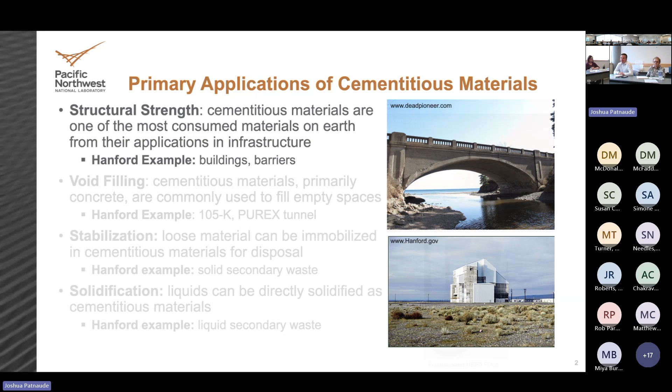The next approach people take is: if you've got a large space and want to fill it with something solid, do some void filling. Cementitious materials are an excellent low-cost, low-heat-generating approach to fill empty spaces. This is done across the globe, and specifically in waste cleanup, this is what we do when we D&D facilities or need urgent space filling. A perfect example of void filling was the Purex tunnel—to remediate the collapse that happened, you go in with a material that can flow into that large space and fill the gap.

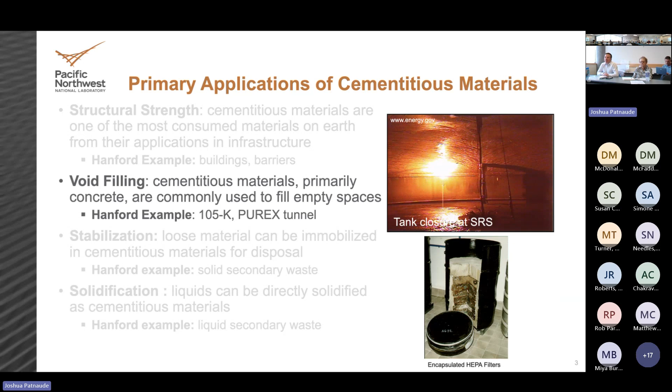Now we start to drift into applications more relevant to waste disposal, not just nuclear but waste disposal in general. Another good use of cementitious materials is stabilization. If you have a loose or particulate material that's hard to handle and transport, using a cementitious material that starts as a liquid slurry and then solidifies into a solid mass you can move is a great way to stabilize particulates. This is used broadly in the waste disposal community when stabilization is required. Here at Hanford, this would apply to handling particulate secondary waste generated from WTP—things coming out of the off-gas management system, fine particulates that need to be stabilized for disposal, using a cementitious material or grout to do that.

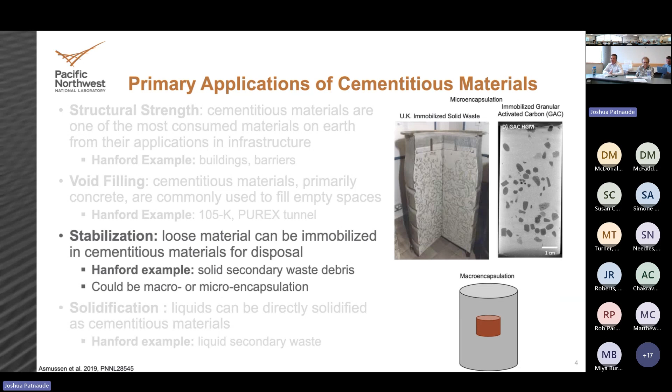And finally, where we drift more into the nuclear application space, cementitious materials are great for solidification because fundamentally they take a set of dry reagents—hydraulic cements—mix them with water, and that turns the liquid into a solid.

When we're doing solidification of a liquid waste, whether it's from a nuclear source or a wastewater, cementitious materials make a perfect option for this because you just add in some dry reagents and that liquid stream is now a solid mass that you can move to your desired location. It also gives you control over the properties of that final solidified product, depending on where it's going for disposal. So those are the four main applications we see generally across the globe for hydraulic cements, and we use them here at the Hanford Mission all across. So let's go to the next slide.

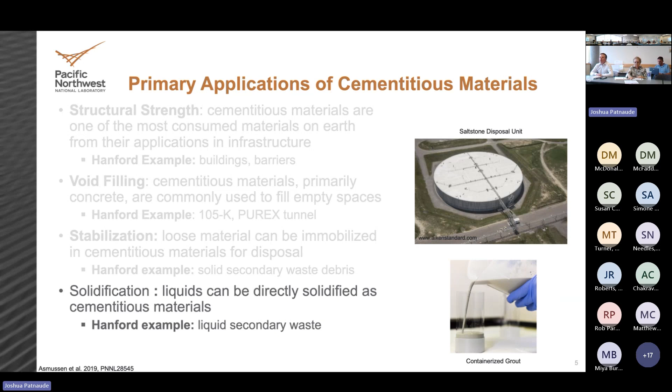We'll get into how they fundamentally work. We use cement as the example here, but pretty much any of the reagents we'd use in forming a cementitious material go through a fairly similar process: hydration reactions. I'll be explicit that we're speaking to hydraulic cements here, cements that react with water. We're not talking about materials like putty you'd put on your wall that react with CO2 in the air. Specific to hydraulic cements, what they do is go through a series of reactions called hydration reactions, and that is how you go from a liquid mixed with dry powder into a solid.

What happens is when you take cement, that fine powder, and put it into water, the particles start to dissolve in the water. As those individual grains start to dissolve, you release the dissolved components into solution. One of the fundamental chemistry rules is as you increase concentrations in solution, you eventually hit solubility limits, and as you hit those limits, things start to precipitate and grow out of solution. You can only keep so much in that liquid environment. That's exactly what's happening when you put cement into water.

The individual grains start to dissolve out, concentrations rapidly increase because it's a very fine powder with high surface area, a lot of dissolution happening, and you start precipitating what are known as hydration products. These hydration products, depending on the chemical content of the liquid and the makeup of that cement powder, can be a range of amorphous or crystalline phases that grow and link up together, and that's where the material gets its strength. Eventually you've reacted enough of the water and precipitated enough of those hydration products that you form a solid mass. So that liquid goes into a slurry and then cures into a solid particle.

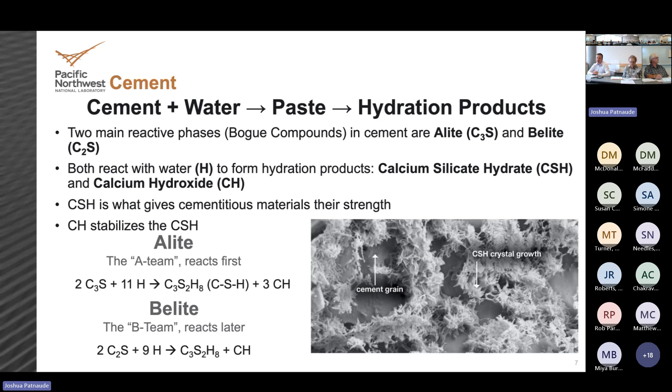So what does the progression of a cementitious material look like from the time you make it through its entire life? And I'm lucky that cementitious materials follow a similar pathway and terminology to the career that Will Smith has had. So when they start out, you have raw materials, similar to how, if you were a fan of hip hop in the late 1980s, Smith and Jazzy Jeff, their original stuff, it's not bad. It's a little rough around the edges, but it's a raw material.

Once you mix that cement powder with water, what you get is what's called a fresh material or fresh paste, similar to Will Smith's first thing being the Fresh Prince. Once you've had a fresh material, you're very much in a slurry state.

And as those cement reactions start to continue and we grow some of those minerals and things start to link up, you end up with a hardened paste. Will Smith became hardened in the mid-90s when he moved out of that Fresh Prince role and starred in Bad Boys, a very R-rated film that they should have stopped at just one. But you end up as a hardened material.

But at that point, it's still a young cement.

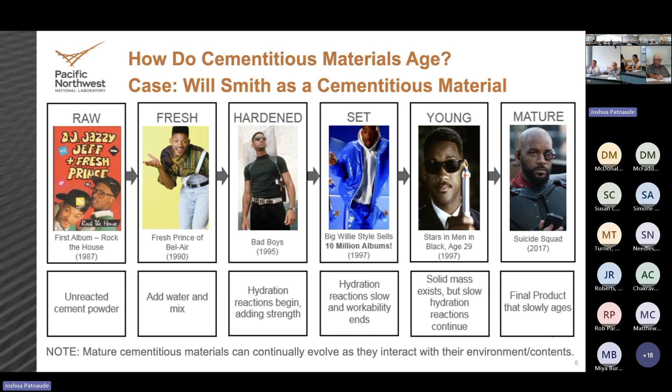Okay, next slide. And sometimes maybe the cement will crack. Smith cracked a couple of years ago.

But that also depends on what your material is, what the service environment is, what loads are put on it, and a lot of effort goes into us on the waste form side, but also the cement and concrete industry, trying to develop tools to be able to model and predict the probability of what the degree of cracking in cement materials would be, and what the failure modes would look like.

Some of the certainties in life are death, taxes, and your concrete will crack at some point, but that cracking could take thousands of years depending on what you put into it. So next slide.

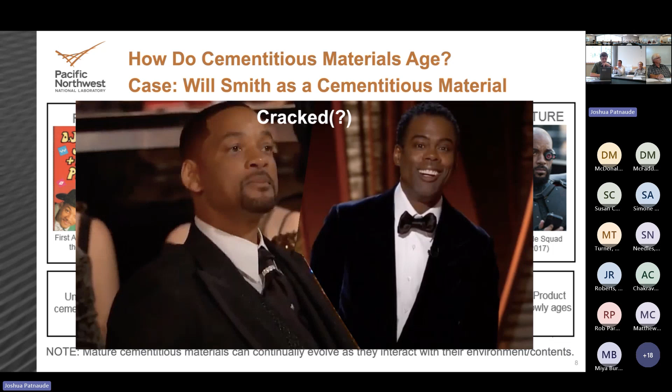Okay, so that was the case, just speaking solely to cement. But in nearly every application in waste immobilization or the general infrastructure application of cementitious materials, you don't just use 100% cement. And why is that? Why do we use additives and other things? There's a number of reasons for that.

The first one is from an environmental standpoint. In order to produce cement for use in cementitious materials, you require a lot of heat. You have to take a clay material, heat it up to very high temperature to produce clinker. We'll touch on that in a second. That goes into your eventual cement powder.

And doing that, it's usually done—we make a little bit of cement here in the US, but relative to the rest of the world, that cement generation is done with not carbon-friendly processes. So when we do environmental analyses, this is where you pay the largest carbon penalty, for example, in the production of cement. So you get a lot of CO2 production because it is a byproduct of the process, and also a byproduct of most of the power sources that run our cement production throughout the globe.

The other reason is demand. Like I said, cement is one of the most consumed substances annually across the globe. So there's a large demand for cement. So if you can use other materials or waste materials and lessen your demand, well, you save a lot of material, and you also save a lot of cost.

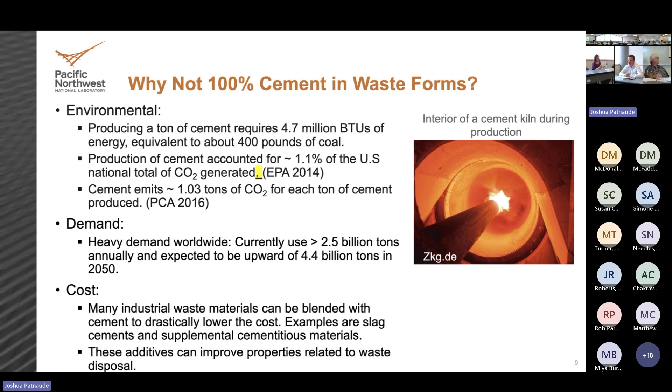Okay, so go to the next slide. So some of the definitions that take it from cement to the actual materials, and I'll show how this fits in waste management in a second.

So if we take cement and water and mix it together, that's not usually a material that's used quite a lot because of that cost factor. So what people try to do, especially in an infrastructure or structural application, is add stuff into it to take up space without sacrificing properties.

And the two most common things you do are you either add in sand or you add in rocks. So if you take cement and water and add in sand, that gets you a mortar. If you take cement, sand, and add in some rocks, that gets you concrete. And in both of those cases, those aggregates are just acting as a filler.

They're not really giving a lot of properties. You might get a small uptick in strength, depending on how you formulated things. But the biggest reason you're adding aggregates in there is just to take up space and use less cement to fill whatever structure you're trying to construct. So next slide.

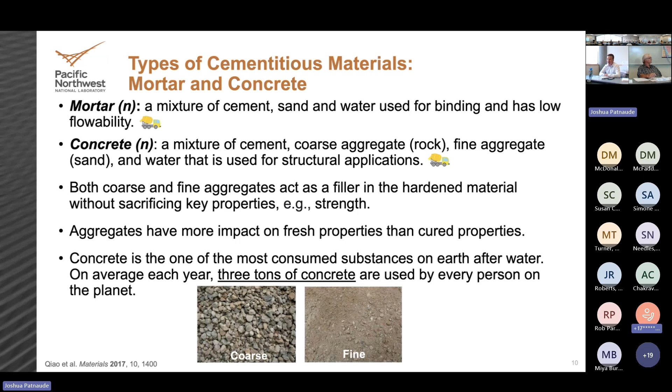So how do these mixes all come together, and how do we group things in terms of our terminology when we do waste management?

What we start out with to get to a cement product is limestone and clay. You mix them together, put them in a kiln, and heat it up to about 1400 degrees Celsius. What comes out of that kiln are little nodules, and those nodules are called clinker. This material contains tricalcium silicate, dicalcium silicate, those reactive compounds that will end up making those hydration products. So the nodules that come out are clinker.

This is the main reactive component of cement. They'll take these nodules, grind them up into a fine powder, and mix it with other chemicals - aluminum sources, lime, magnesium sources - to tailor the resulting cement powder for a specific application. There are a number of different types of cement. The most common ones are type 1, type 2 Portland cement, which is now essentially type 1L cement, which is Portland limestone cement. You do those additives to get specific properties in your final material, but also to save cost.

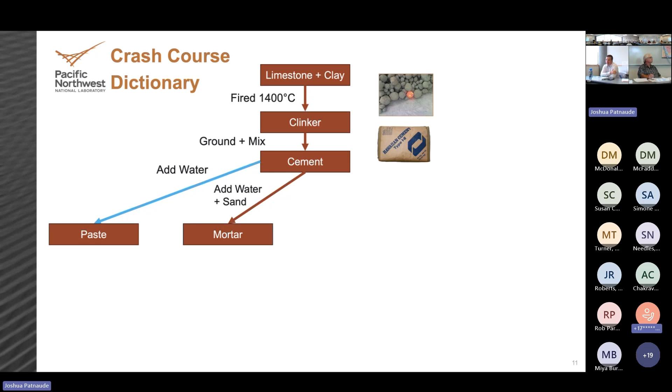If we make something that looks like mortar, but add some chemical additives to make it flow a bit more, this is traditionally referred to as grout - flowable slurries used to fill the space between tiles on your floor. One of the main challenges when I speak to university partners is that when I say we use grout for nuclear waste immobilization, this is where people's brains go right away. I like showing these slides - yes, this is our traditional definition of grout, but we'll get to in a second why we call everything grout. So the mixture of cement, water, sand with some additives gets you a flowable material - that's a grout.

And then if you add in coarse aggregate, throwing in some rocks, that gets you concrete. My prior experience in cement and concrete before coming to PNNL - my grandfather was a contractor, so I poured thousands of yards of concrete with him working it throughout the years.

I never put two and two together why he would always, especially when I was really little, send me out to find the biggest rocks I could at the site when we were doing a foundation or something, and we would just throw them in. Oh, I'm just filling space. It was aggregate, but it's filling space.

So that's the main technical definitions of the various types of products you get when you mix cement with water and other fillers: paste, mortars, grouts, or concrete. But within the DOE world, or anywhere here in the US, if we apply this to nuclear waste immobilization or disposal, all of those can be referred to as grout.

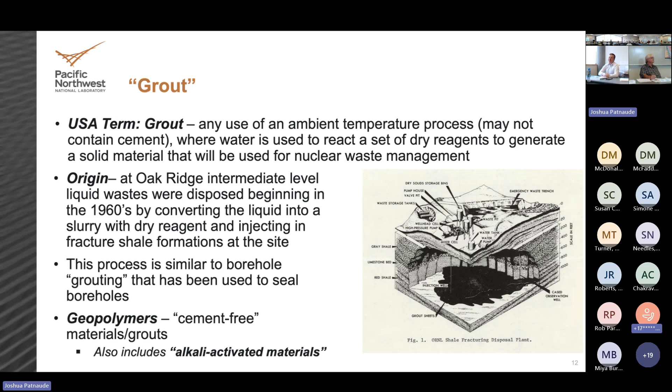So in those four types of materials we'd call grout, where do we apply them in waste management? The first one, paste - what we produce when we do liquid waste immobilization, such as producing saltstone at the Savannah River site. That resulting material is a paste, just a set of dry reagents mixed with a liquid, looking no different than if you mix cement and water. Nothing else gets added; you're just using dry reagents designed to properly react with that liquid and its chemistry.

Then, moving into solid waste encapsulation or stabilization of particulate materials - depending on the material, the disposal site, and desired properties - we can use paste, mortars, or things more flowable like grouts. Paste and mortars are used for particulate stabilization or macro encapsulation. So if we have HEPA filters to encapsulate, you'd use something like a paste or mortar. If we've got a spent melter from a waste treatment plant to be encapsulated for disposal, you'd use a paste or mortar. On the grout side of things, that's something we'd use for maybe more facility closure.

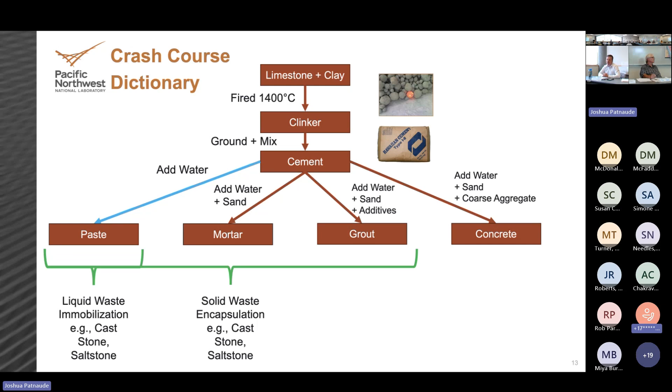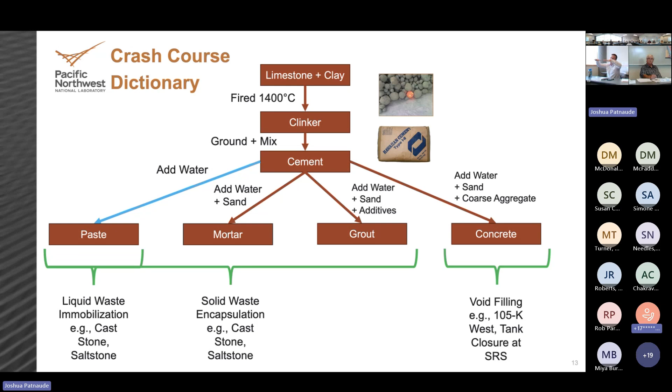So if we're D&Ding a facility and you wanted to fill into a void space, something that looks like a grout that will run and flow is likely used. And then concretes are things that look a lot like what we've used in void filling or tank closure at other sites, mainly the tank closure done at Savannah River Site. Those materials are very similar to conventional concretes, although tailored to be far more flowable and have ideal set times. If you're filling a million gallon tank, you can continually operate and get a resulting product, but it looks a lot like concrete.

So, I'm telling the story of why we add other things in. If you're doing this from an industrial standpoint, the main reason why they add other things into the cement is to save costs. They do get some control over properties, but their main driver is less cement equals less money.

In our world, the use of supplementary cementitious materials really lets us get control over engineering targeted properties into our grouts that will be used to meet specific waste immobilization challenges. All these different components that we can take from industrial byproducts have similar hydration reactions, and we can use their individual properties to tailor our materials to meet specific needs in our waste management challenges.

So the technical term for these is supplementary cementitious materials, things that aren't cement that we add into grouts or cementitious materials to make our final products.

These supplementary cementitious materials can have different sources. They can come from natural sources, which we'd call pozzolana, meaning a naturally occurring material that has pozzolanic activity, the ability to react with water and a bit of calcium to produce hydration reactions. These are mainly aluminosilicate materials from volcanoes or prior volcanic activity. Fundamentally, you have a mineral containing calcium, silicon, and aluminum, exposed to very high temperature, powdered down, and it becomes reactive with water. It's no different than what happened with cement, where you took limestone and clay, cooked it at a very high temperature, and produced a powder that can react.

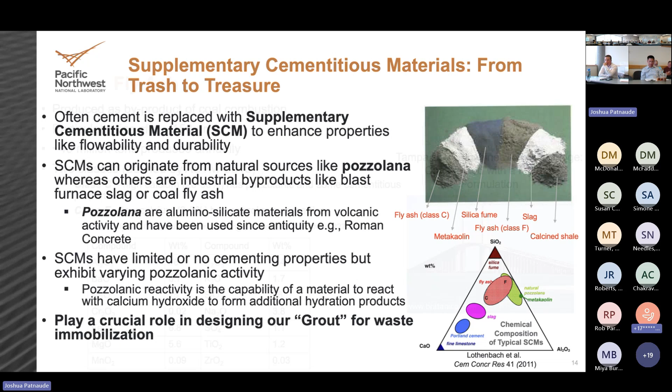But the other source of materials with pozzolanic activity comes from industrial byproducts, and I'll touch on a few of these in a minute. Again, these play a crucial role in our ability to tailor specific properties. So I'll go through a couple of key examples.

One of the first and most widely used supplementary cementitious materials in industrial applications, and one we use in a lot of our waste applications, is fly ash. This is a byproduct of coal combustion, a waste product that just sits in piles at coal production facilities. It's a fine powder, depending on where you get it, how fine it is. There's about 40 million tons produced annually.

It's used quite heavily, especially in bridge construction or precast cement applications. There are two main classes: Class C, which has high calcium, a key component for hydration reactions, and Class F, which has low calcium but is usually a bit cleaner. Again, it's a calcium aluminosilicate material from a high temperature process, and the resulting powder has pozzolanic activity.

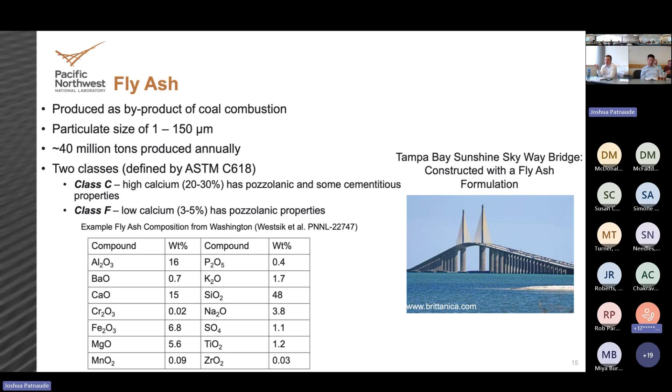So what do we use it for in terms of waste forms? One of the biggest uses is it improves workability. When we're mixing the dry reagents of the liquid waste and water, the fly ash really helps with the rheology of that resulting slurry, keeping it flowable and movable. The reason for that is pretty practical.

The little fly ash beads that come out look like tiny ball bearings or little balls. Physically in the mixture, if things are moving around with sharp edges, they can run into each other, making mixtures thicker. But these little balls of fly ash are just rolling around in the slurry, which really helps us mix what would traditionally be a tougher mixture together.

It decreases the amount of water we have to use, it produces less heat so you have lower energy there, and you can delay set times. The introduction of fly ash is actually crucial to the production of the saltstone waste form at the Savannah River Site, because they take their waste, mix it in a central facility, and then pump it out to large disposal units. The introduction of about 45% fly ash in their mixture helps sustain flow of the slurry through that line and into the large vault, specifically because of these properties.

So we use it quite a lot because it gives us good control of our rheological properties.

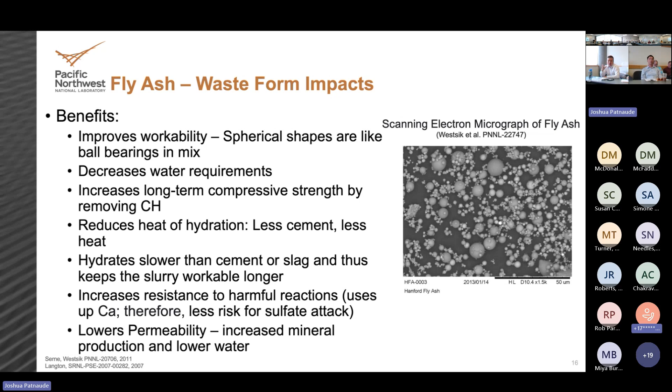The next big one for us is blast furnace slag, which is a byproduct of iron production. You take iron ore and put it into a high temperature process, trying to separate the iron from everything in the ore that's carrying it. The resulting material that comes out looks a lot like glass. You combine limestone, used as a flux in the processing, and what you get is slag, blast furnace slag, containing calcium, aluminum, and silicon from a high temperature process.

You take that glass, you grind it down, and it becomes reactive. It's usually a very fine particle size, about 10 microns. When you grind it up, you get higher surface area and it becomes more reactive. The composition depends on what your iron source was, but a lot of iron sources come from an original ore that is pyrite, which contains sulfur, and the sulfur is a key component for us in waste immobilization.

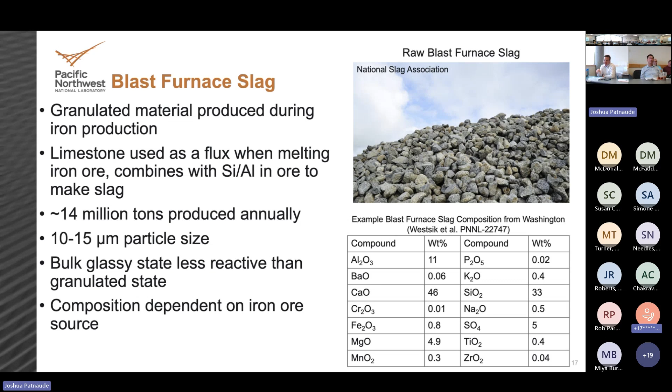Let's go to the next slide. What the sulfur does is provide electrons and a reducing environment, which helps suppress the release of contaminants, in our case radionuclides, by reducing them to a lower oxidation state.

One of the fundamental mechanisms of why saltstone works for low-level waste immobilization at the Savannah River Site is their work in the 1980s to develop the saltstone formulation. The inclusion of blast furnace slag greatly suppressed the release of chromium in their waste, showing marked improvement in both TCLP tests and long-term leaching.

Because the blast furnace slag comes in, it brings in reducing capacity primarily from its sulfur component. That sulfur component will go out to the contaminants that are redox sensitive, which chromium is. They can get involved in redox reactions and reduce those contaminants from a mobile state to an immobile state.

It has other benefits from a cementitious standpoint. It gives us some control over workability, how much heat is generated, and porosity control. But the biggest piece in waste immobilization, if we're using slag, is that it helps with contaminant retention, both in short-term qualification testing and long-term performance.

Because the slag glass itself, just like the cement, doesn't fully react, in our waste forms we still see little slices of slag glass. So over long periods of time, that slag continually dissolves, continually releases those reducing species, and helps build in some long-term retention mechanisms to the grout waste forms. So, next slide.

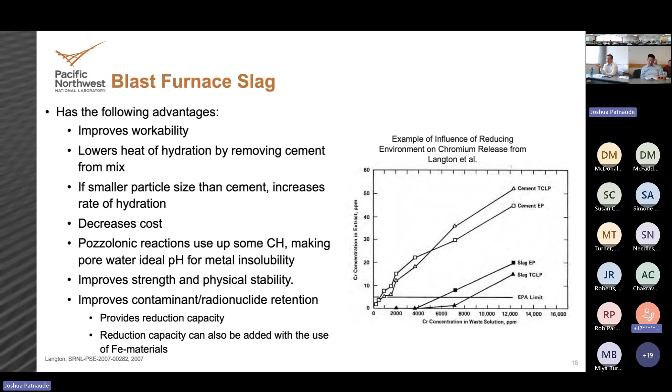Another key addition is admixtures. These are chemical components that we can add in to get control, mainly during processing of the material. They can be very complex engineered materials that Dow Chemical makes, or things that Dow Chemical will tell you are very complex materials, but they're just molasses dissolved in water. Not lying.

What admixtures are designed to do is, if we can't get ideal processing by the introduction of fly ash or blast furnace slag, or maybe our waste chemistry isn't ideal, we can add in different chemicals to accelerate or slow down those hydration reactions.

One of the main processes admixtures do is act as set retarders, protecting the cement particles and preventing water from getting to them. If water doesn't reach the cement particle, it can't dissolve and can't be involved in those hydration reactions. So when you put a super plasticizer, a set retarder, in, it's an organic compound that finds the cement particle, coats it, and water will slowly get to the particle, slowing down the rate of reactions and therefore slowing down your set times.

A practical application of this: if you're doing a small concrete job in your yard and you make a mistake, which happens to many of us, and you end up with concrete where you don't want it to be, the way to solve that problem is you run inside, get a bag of sugar, and dump the sugar on top of that slurry concrete. The sugar is an organic compound, and it'll seep into the cement particles.

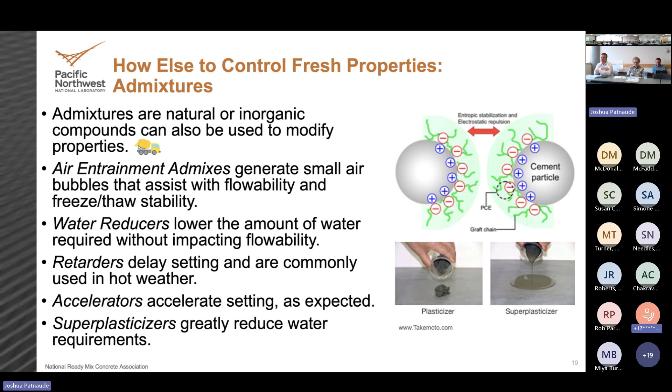Depending on what the target is, one of Dow's major admixtures is molasses dissolved in water for that specific application, just coating things. We use it as we get to some of our low water content mixtures where we're trying to get low porosity. We lean heavily on chemical admixtures to help us produce our final waste form that has the target properties.

Some quick examples of other supplementary cementitious materials that are emerging a lot more in both industry and in our spaces: silica fume, referred to as flour in the cement industry, a byproduct of silicon wafer production. As we move away from coal production globally, we're going to produce a lot more chips, so we get a lot more waste silica fume. This material is great, again, a very fine powder.

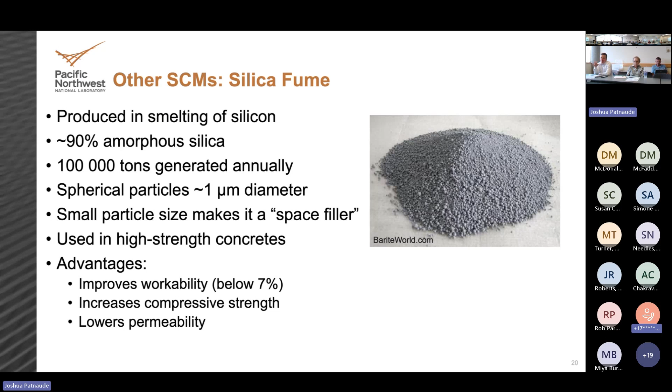It's used as a space filler. We have growing inventories of it globally, so we're seeing a lot more use in the cement and concrete industry. On the waste side of things, we like to play around with it when we're doing geopolymer development, because it helps fill void space in the material. If you have less porosity, you have less transport, less water in, less mobility of transports out. So silica fume is an emerging one.

Metakaolin is another one. It's just a calcined kaolin clay that's used heavily in geopolymers. It's an aluminosilicate material; you add in some high pH solution, it reacts, and makes a solid mass.

This isn't one we do in waste yet here in North America, but some of my colleagues in Southeast Asia do. You've seen a theme here: any material that has pozzolanic activity is a natural material exposed to high temperature, becomes a powder with reactivity. Well, some very ingenious people have taken the husks from rice, and when they burn it for energy sources, the resulting powder has pozzolanic activity. So rice husk ash has been an emerging supplementary cementitious material, especially in Southeast Asia, and it shows promise to replace fly ash as we see global fly ash amounts start to decrease. This could be a possible replacement.

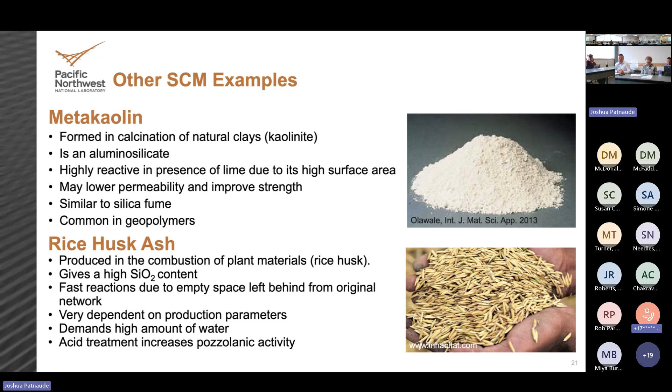The cement community looks broad and wide for other supplementary cementitious materials, and we put our finger on the pulse of that. If they learn something, we always want to be trying it in our grout applications, because if we're doing waste immobilization, we want to be using the best materials and best design that we know to date. So we're always trying to learn.

A quick note, I mentioned geopolymers earlier. The difference between geopolymers and a traditional hydraulic cement is that in cement, growing the hydration products, you get dissolution and then precipitation of mineral phases that start to link up. At its core, what a geopolymer does is use something like a metakaolin product, which still has calcium, silicon, and aluminum in it. But instead of growing minerals, you start to get polymerization, where the various silicon atoms start to link up with one another and bond together, and you end up making a solid mass.

Although in waste immobilization, and in my opinion, geopolymers in general really is a gray area between what you call a hydraulic cement and what you call a geopolymer, because once you add in things like slag and fly ash to a geopolymer, you start to grow some traditional hydration products. It's not pure polymerization. So to me, geopolymers is just a broad term that people throw around if you don't have cement in your system.

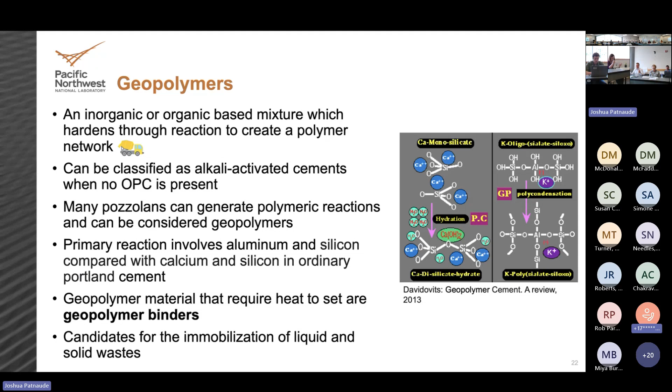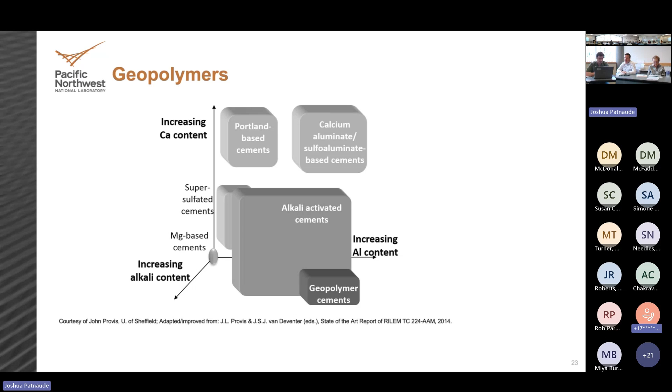High calcium, your cement - as your calcium amount drops out, which you do by removing the cement, you end up in geopolymer territory, but they're not all polymeric products in the material. But in our case, if someone's talking geopolymer, it's still a grout.

So what are some of the key properties that we would want to control when we're doing various waste immobilization challenges? They get binned into 4 different classes: fresh properties, cured properties, ones related to performance, and then aging of the material.

What dictates the properties when we're doing waste immobilization? It starts with the disposal site itself, or where this material will be employed. Once you know the requirements of your disposal site, you back engineer into what properties your material needs to have to ensure we meet waste acceptance or long-term performance requirements to serve in that application. We use that to help define our candidate formulations to get us those target properties. And then we look at the waste stream itself.

What chemistry is it bringing? What physical properties is it bringing in? Will these formulations work for it? And can we produce a final waste form that has those properties?

The way this flows through: the fresh properties are things that help us process and produce the material. The cured properties are our target final end game that we want to hit. The performance is what we like to see those resulting properties lead us into. And then those performance properties get influenced, depending on the application, by how that material will age with time.

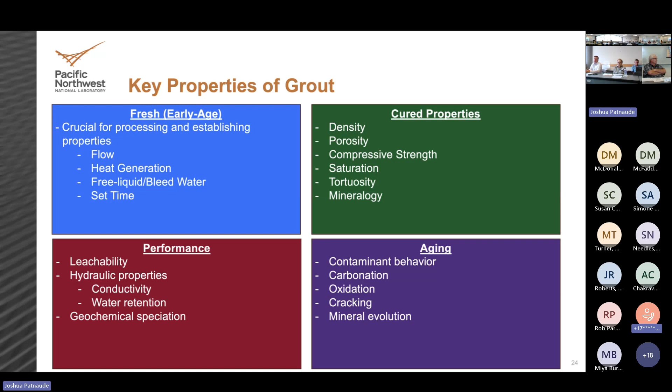Cracking, and then the overall mineral evolution - because, like I said at the start, grouts are not static materials. They continually react with time. Those reactions can bake pretty good properties into the material, or if you're not smart about how you designed it, negative properties.

So how do the various contaminants behave within cementitious materials? I touched on this a couple times throughout the presentation. Cementitious materials are widely used for low-level or hazardous waste immobilization throughout the globe, not just in the nuclear sector, but for handling wastewaters as well. Cementation is the BDAT for most of the D-code metals and some F-code aqueous waste that contain metal.

Mainly, it's the metals that will precipitate once you get to a high pH. If you remember from the start, that fundamental chemistry - one of the products we make is calcium hydroxide. That makes a high pH environment that stabilizes the calcium silicate hydrate. Well, high pHs also lead to precipitation of many of the hazardous metals. And if they precipitate down from a soluble state to an insoluble state, they're not mobile - they're contained within the waste form.

We can also get that suppression by building reduction mechanisms into the waste form, by adding slag, or adding iron, or adding sulfur in. This will also suppress the release of metal species and some redox-sensitive radionuclides like technetium.

If we're doing liquid waste immobilization, what happens when we mix our dry reagents and that liquid together? The liquid contains a range of chemical components, contaminants, and in some cases radionuclides. As the dry reagents start reacting, the water starts to get consumed. Where the pores come from in cement is spaces where there used to be water.

It's a way to think about it. There's a decent correlation between your resulting porosity and how much water you started with. So as you consume water and make those mineral networks, the pores left behind become where those salts from the dissolving liquid waste start to concentrate in that pore space. That's where the chemistry happens.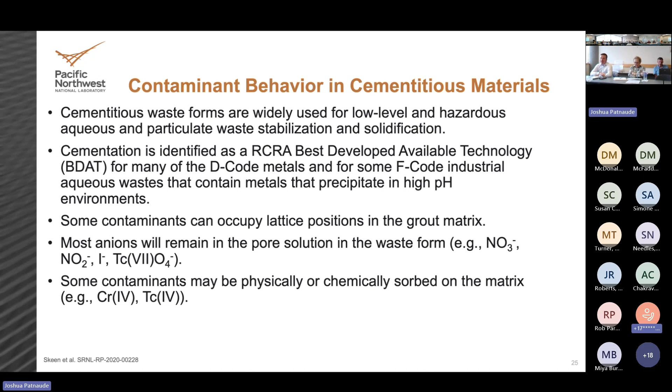That's a general sense—I could spend a whole lecture going through one by one what happens with each of those in different grouts. But the takeaway is that when we do the hydration, you get the same fundamental reactions, but as you create those pore volumes, that's where the chemistry happens, and that's where contaminants either get incorporated into the grout, precipitated out, or persist in that pore space.

I thought I had this as an animation, but some of the main leach tests: TCLP, the semi-dynamic leach test, and then to get to more real-world conditions, especially in our application, unsaturated testing, which takes a very long time because you don't have a lot of water nearby. We want to ensure the models we develop to predict long-term performance can replicate behavior, whether it's in short-term aggressive tests, longer-term representative tests, field tests, or analogs.

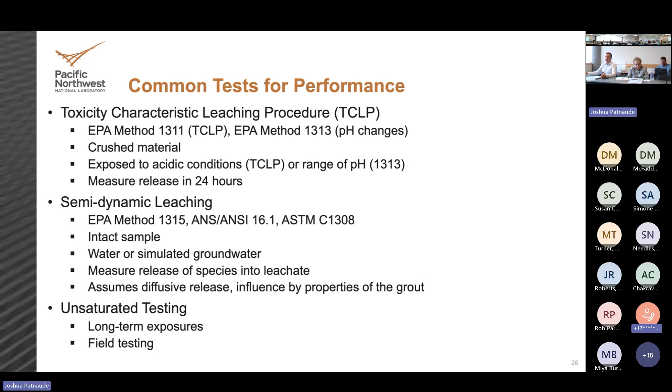We always try to build our story out so we grow confidence in the materials that we are providing data for folks to make decisions on. So, next slide.

This, again, is something I spoke about before. The main property driver for us—this is one of the takeaways I try to instill in my staff—is when they get tasked with designing a formulation or making a test matrix to meet an emerging need, whether it's H2C or DOE coming to us saying we have this potential waste stream, what are our candidates, what can we do—what I try to get my people to think about is start from your disposal site and work your way back.

If you're going to a disposal site that does not have a pathway to potable water or back to the biosphere, such as the Energy Solutions Facility in Clive, Utah, or Waste Control Specialists in Andrews, Texas, those disposal sites, from a general waste disposal standpoint, are geographically ideal. They're isolated, there's no potable water at those sites, so their waste acceptance criteria becomes set on land disposal limits and inventory limits for the radionuclides, because if you put the waste forms and contaminants in there, they're not going to enter the biosphere.

For example, at the Clive site, you're sitting right near the salt flats—if you decided to drill down and start drinking the well water, the salinity would do a lot more damage to you in a shorter time period than any uptake of contaminants that may exist at the site. That's generally how their performance assessment is constructed: what is our impact? Pathways to potable water and groundwater are very limited to non-existent, so they set limits based on waste classification and inventory limits of how much of a radionuclide they can take.

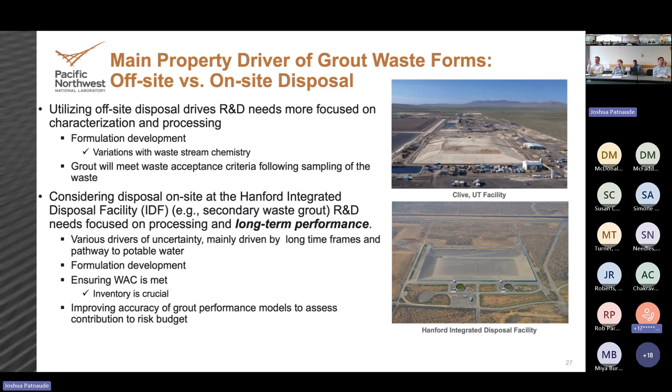So the final slide is just one quick takeaway. The three main applications we deal with here in the Hanford mission are: liquid waste immobilization, where we're making things that look like paste; solid waste encapsulation, whether micro or macro encapsulation, using things that look like paste, mortars, or traditional grouts; and void filling, where we use things that look like concrete.

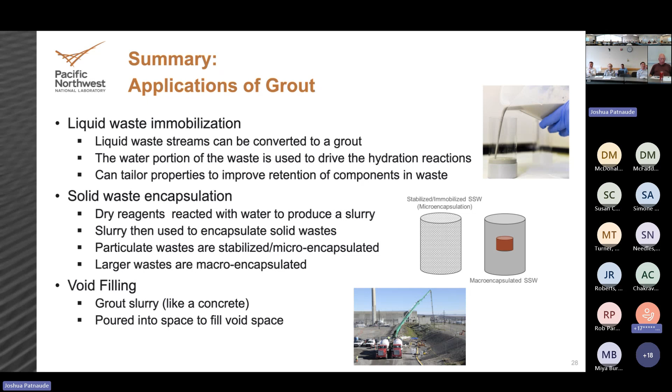So that's what I wanted to talk through. I hope that answered a lot of the information you guys were looking for. Again, if I missed anything, feel free to ask—I can sit here all day, I can come back, happy to. So yeah, I'm sorry if I went long, I just like giving this presentation. Thanks. No, that's very good. Thank you.

Yeah, there's tons and tons of questions that people would have, but I think we should get a view from, maybe from ecology. This is kind of a one-on-one thing, so I don't know. The way this one's set up is two back-to-back presentations—we want to hear from Ricky Bang on the testbed initiative, and then we'll jump to regulatory support cycles.

Okay, you want to have questions for Matt first before we get into testbed? I'm sure you really appreciate the master class. Let those build up for a second.

That was great. Was this gone through when they did the grouting inside U Plant? Yeah, similar concept. How about the tunnels? Yeah, and I showed a picture of the tunnels. In those approaches, you're going for more of a traditional infrastructure-type application—we're just trying to fill a space. So the formulations they used for each of those made perfect sense for what we were trying to do, which was fill a void space. Was that looked at separately? Yes, they were separate. Okay, that's good.

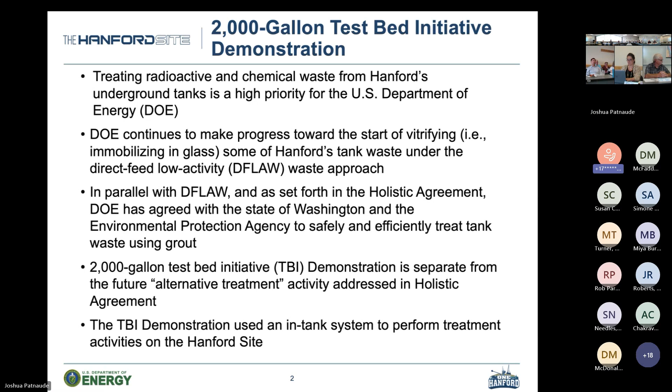Next slide. So we had performed a 2,000 gallon test bed initiative demonstration. We had fabricated the equipment, installed it in SY Farm in the 200 West area. The equipment was installed in October, operated, and treated 1,961 gallons out of tank SY101.

Now from the material that was treated there, it was stored into 6 totes, which were then shipped at the end of April of this year to Clive, Utah, and WCS in Andrews, Texas.

There were some animations on this slide to point out some of the equipment we installed in SY101, including the pump and ion exchange column that went inside the tank, and secondary equipment towards the delay tote. Let's click through item number 6.

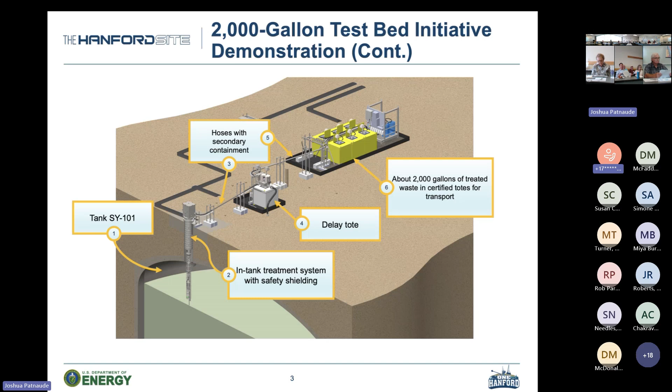The delay tote confirmed that the ion exchange column did operate as intended. The storage totes in yellow stored the 2,000 gallons of pre-treated liquid waste, and then those yellow totes were used for transport of the material to Utah and Texas.

Next slide. As part of the test bed initiative research, development, and demonstration permit with the state of Washington, there were 6 objectives that we included in the permit.

They're listed there, but through the operations of the test bed initiative equipment, we demonstrated that we can filter solids and remove cesium with the system installed into SY101. Through sampling of the pre-treated material, we verified that the treated waste met the waste acceptance criteria for the disposal sites in Utah and Texas.

Objectives 3 through 6 will be demonstrated as the vendors in Utah and Texas go through their treatment processes, perform the grouting, and then dispose of the waste. We should be getting final reports from both those sites this year.

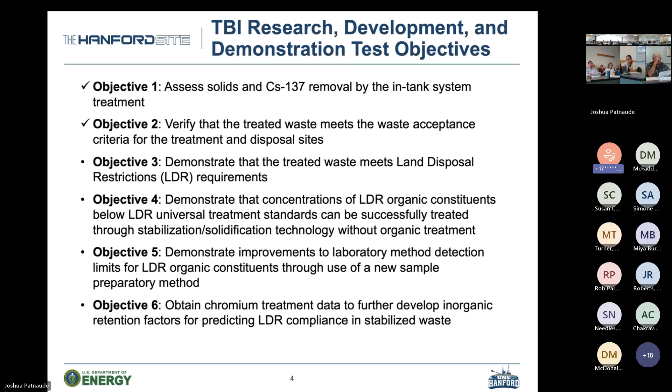The next couple of slides I'll go through pretty quickly. There's probably a couple of good photos towards the end of this. But again, the first objective was the removal of cesium, which we demonstrated.

99.99% of the cesium from what was in SY101 was removed by the ion exchange columns, based on sample results from the storage totes. And again, no settled solids were found inside the transport totes following the test bed initiative treatment.

Radiological surface dose was less than 0.5 millirem, and we couldn't measure less than that because the background radiation was about 0.5 millirem.

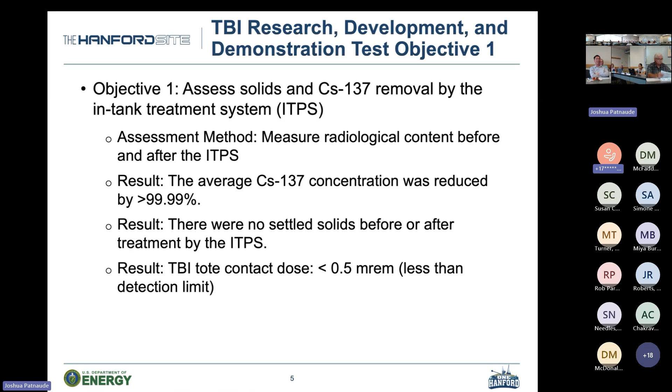Next slide, to put that into context: that radiological dose is about what you would get from a dental x-ray at your annual visit to the dentist's office.

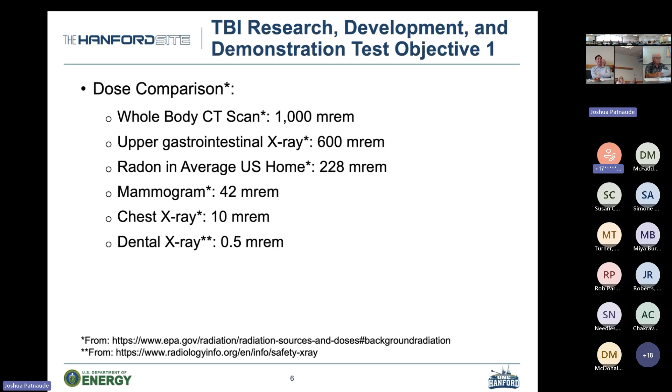Next slide. Objective 2 had to do with meeting the waste acceptance criteria for the disposal locations in Utah and Texas. Based on the criteria those sites had for radiological waste classes, free phase with organic contents, and the LDR organic concentration, our sample results demonstrated that we met all of those criteria for shipment and transport to those disposal locations.

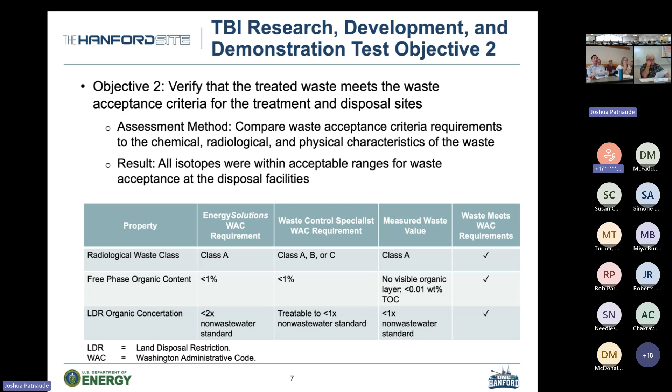Next slide is based on those sample results that we received back in April. We were then able to transport the containers to Utah and Texas. Those yellow containers you see in the upper right were loaded onto the back of the trucks shown in the other photos, 3 containers to a truck, inside an enclosed trailer. Everything was strapped down and shipped to Utah and Texas.

They were received at both facilities. These photos were taken at the very end of April as the trucks left the Hanford site. All 6 totes arrived at the destinations in early May.

Today being, I think, the first week of June, the latest update I can share is that the shipment that made it to EnergySolutions in Clive, Utah—I can confirm that last Thursday, half of their TBI waste was grouted and disposed at Energy Solutions.

So that's been at least physically confirmed, and we'll get a final report in the coming weeks. For the fraction sent to WCS in Texas, they're forecasting to have theirs grouted and disposed at the end of this month, and once that occurs, we'll provide the information as we get it. So that's the latest with the testbed initiative shipments and its status, at least with the waste that went to Clive, Utah.

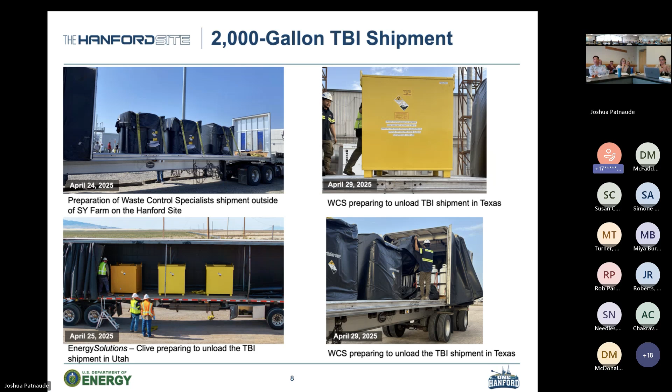Preliminarily, it's been a success, and we're looking forward to continued success at WCS. So far so good, but I think that's been a good step in the right direction to demonstrate that we can meet our commitments with the holistic agreement, and we'll continue working through the regulatory processes to achieve the outcomes and commitments we have in the holistic agreement. Any questions on where we're at with the testbed initiative?

I can provide a quick kind of ecology comments that we had. I know Suzanne wanted to be here today but got tied up, so I was going to provide a couple high level remarks and keep it short and sweet so you guys can ask your questions, and then see if Dan had anything I might have missed. But we just wanted to share, we really appreciate the presentation and the conversation today.

And as Matt covered, there's a lot of other uses for grout at the Hanford site beyond tank waste. He gave the same example I was going to give about grouting for PUREX tunnels, for example, to stabilize those. So there's a lot of non-tank waste uses being employed at the Hanford site. But specific to tank waste, we support grouting low activity waste for offsite disposal.

And I think we've demonstrated this through our report on the 2,000 gallon testbed initiative demonstration that Ricky was just providing an update on, as well as the recently finalized holistic agreement, which I won't get too much into since we just talked about it a couple weeks ago and Ricky's been talking about it. But we think grout has a place in the tank waste treatment toolbox when paired with appropriate offsite disposal sites with more robust geology.

So we think Hanford's not an appropriate place for disposal of grouted low activity waste, given Hanford's geology, depth to groundwater, and proximity to the river.

But veering to TBI and where we're at with TBI, we were really encouraged to hear that Energy safely completed those TBI shipments to Utah and Texas. And as a quick refresher, we provided some support on the TBI project by issuing the research development demonstration permit to Energy for the on-site waste management activities that happened at the Hanford site prior to shipment.